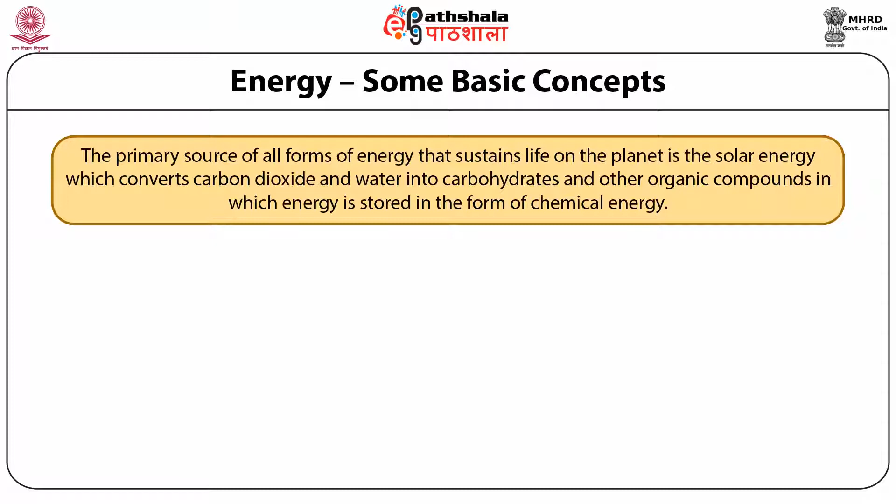Solar energy converts carbon dioxide and water into carbohydrates and other organic compounds, in which energy is stored as chemical energy. In certain situations, these compounds are transformed into coal, oil, and natural gas through geological processes, and when burnt, give heat energy by releasing chemical energy.

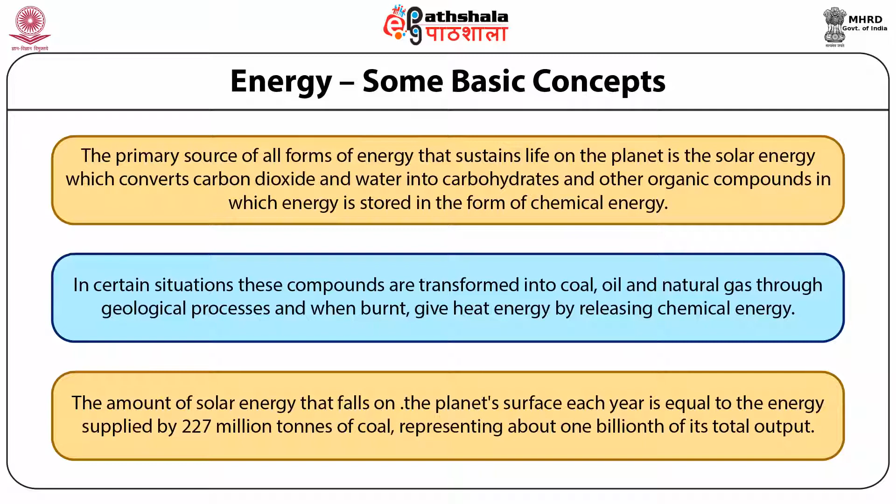The amount of solar energy that falls on the planet's surface each year is equal to the energy supplied by 227 million tons of coal, representing about one billionth of the sun's total output. The rest streams out in all directions into space. In one second, the sun gives off more energy than all people have produced till now, and the sun will continue to supply energy at this rate for a few billion years to come.

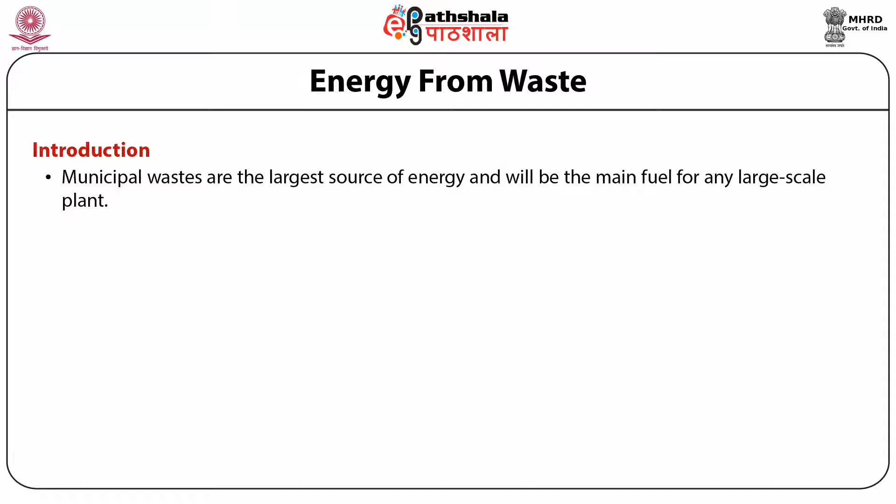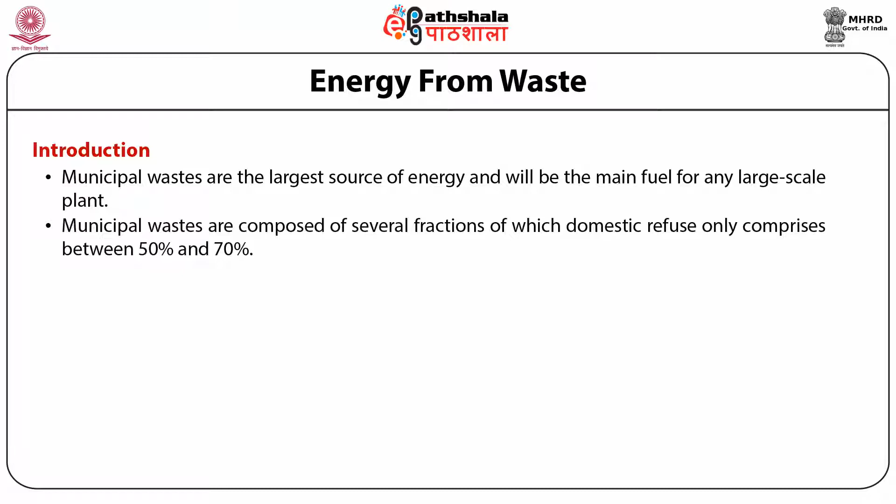Energy from waste: Municipal wastes are the largest source of energy and will be the main fuel for any large-scale plant. Municipal wastes are composed of several fractions, of which domestic refuse only comprises between 50% to 70%. Other categories are waste from waste reception centers, waste from districts' own functions such as housing, markets, and special collection of bulky waste, and some trade waste.

These latter categories are almost all bulky in nature but have a higher calorific value than domestic refuse. The calorific value of domestic refuse is about 9 MJ per kilogram gross, or 7.5 MJ per kilogram net, whereas the gross calorific value of bulky waste has been measured in the range of 11 to 13 MJ per kilogram.

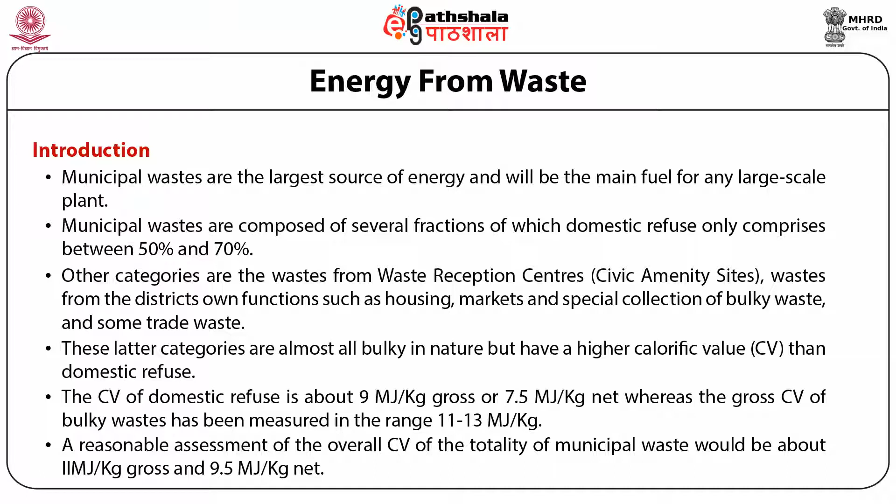A reasonable assessment of the overall calorific value of the totality of municipal waste would be about 11 MJ per kilogram gross. These figures underline the advantage, for energy recovery purposes, of burning the total combustible waste arising, and since bulky waste is costly to transport and landfill, it also makes sense from a waste disposal viewpoint.

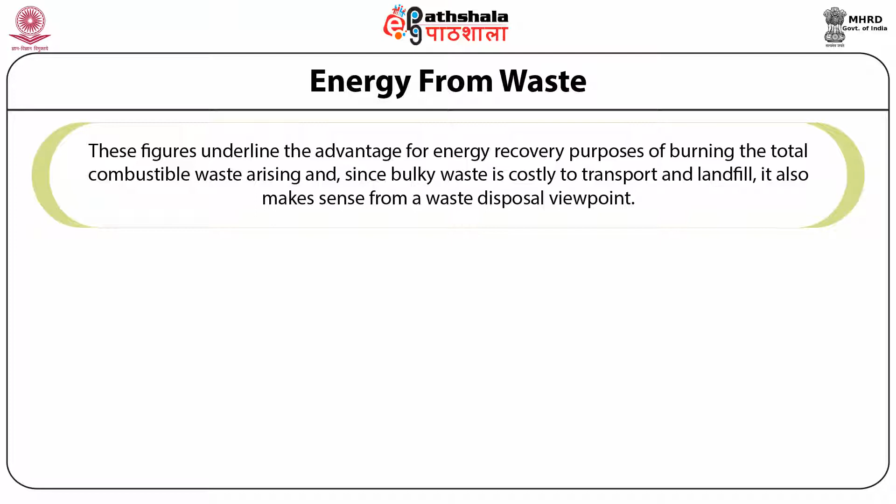Other wastes such as general industrial waste, very similar to bulky municipal waste, tires, fragmentizer waste from car shredding, wood waste, hospital waste, straw and chicken litter can also be utilized where they are of large enough quantities as an economic outlet for the energy. However, there is a sound argument for building a large, efficient central plant designed to burn the maximum amount of waste arising in its catchment area.

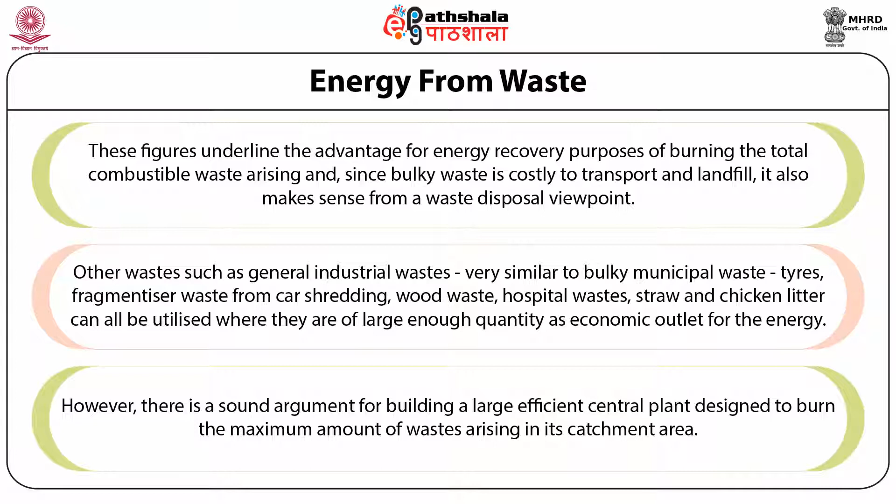This will not apply to straw or chicken litter, which do not have sufficient fuel value in relation to their bulk to travel any distance economically, but it could apply to hospital waste if appropriate handling arrangements were made. The economics of energy from waste revolve around the price obtainable for electricity. If heat can be sold in bulk as well, that will be an advantage, but really substantial opportunities for CHP are rare, and electricity generation must remain the core activity.

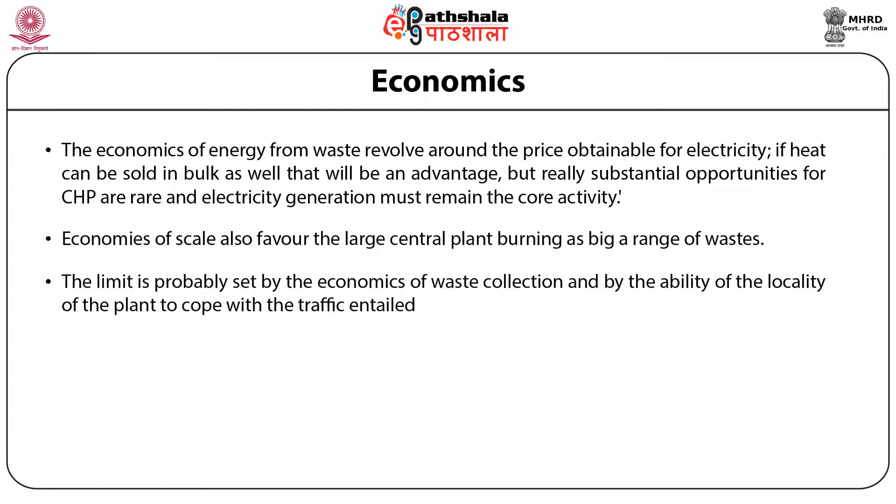Economies of scale also favor the large central plant burning as big a range of wastes. The limit is probably set by the economics of waste collection and by the ability of the locality of the plant to cope with the traffic entailed. A capacity of about 1,200 tons a day is about the optimum without using satellite transfer stations to bring in waste from afield.

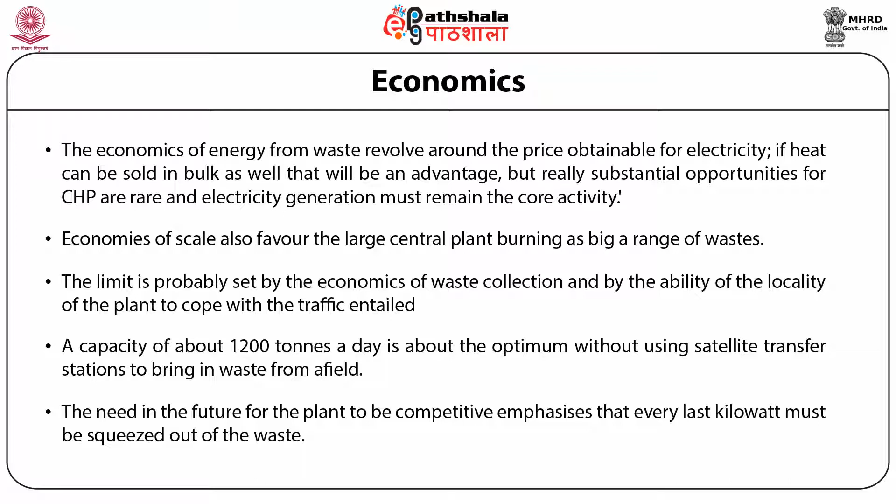Such a plant with an efficient boiler using waste with a net CV of 9.5 megajoule per kilogram ought to extract 0.75 megawatt-hour from a ton of waste, postulating a generating capacity of 37.5 megawatt for 24 hours operating, or 53 megawatt if only operated for 17 hours a day. The need in the future for the plant to be competitive emphasizes that every last kilowatt must be squeezed out of the waste.

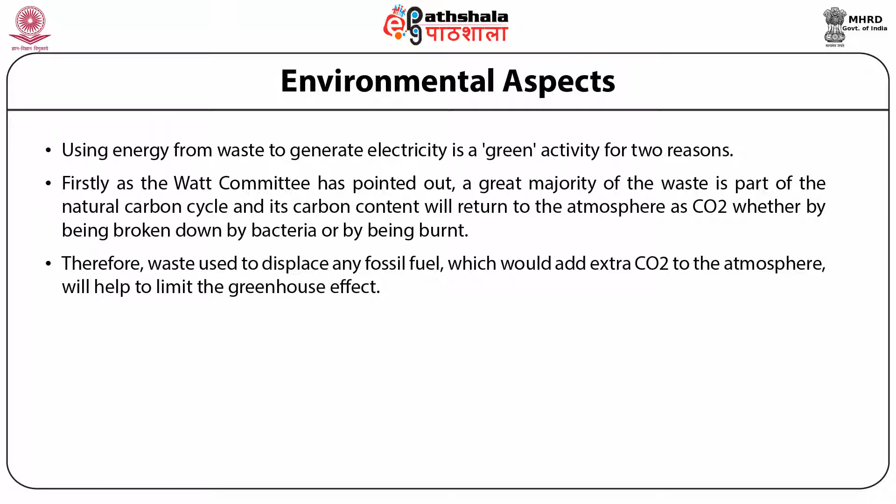Environmental aspects of energy production. Using energy from waste to generate electricity is a green activity for two reasons. Firstly, as the Watt Committee has pointed out, a great majority of the waste is part of the natural carbon cycle, and its carbon content will return to the atmosphere as carbon dioxide, whether by being broken down by bacteria or by being burnt. Therefore, waste used to displace any fossil fuel which would add extra carbon dioxide to the atmosphere will help to limit the greenhouse effect.

Further to that, the bacteria convert much of the carbon to methane. Secondly, as a fuel it has had no energy spent on it, as opposed to coal, oil or even gas, which will have had a considerable amount of energy spent on them by the time they enter a boiler - such energy will have already made its contribution to the pollution of the atmosphere.

Waste processing provides an opportunity to increase the amount of both ferrous and non-ferrous metals recovered, and as regards paper and plastic, if indeed the recycling of the latter is economic, these materials are probably only kept out of the waste stream for a couple of cycles before they enter it for good. The maximum amount of recycling that was likely to take place would have little effect on the recovery of energy from waste.

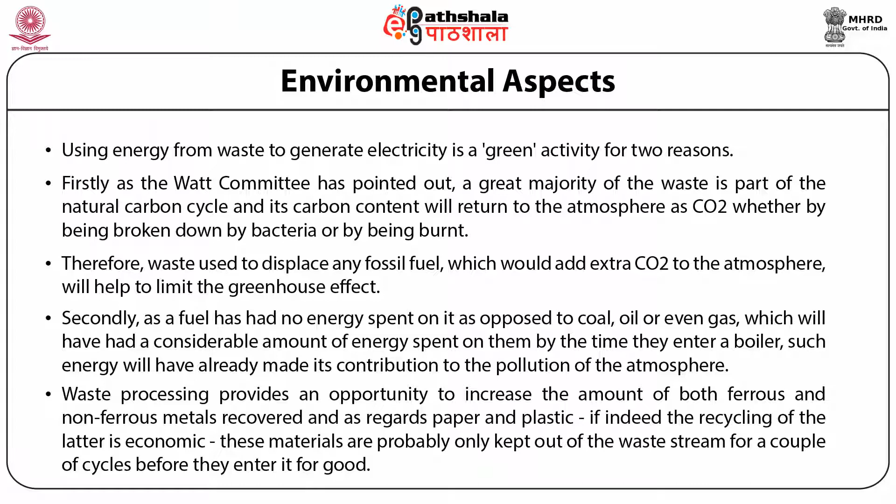Another aspect of energy from waste is that outdated technologies are mainly responsible for generating large quantities of waste. These wastes may be liquid or gaseous. The industry-wise quantities of generation of all such wastes and their characteristics are not accurately known in many cases. Their unsystematic and hazardous way of management leads to serious environmental degradation.

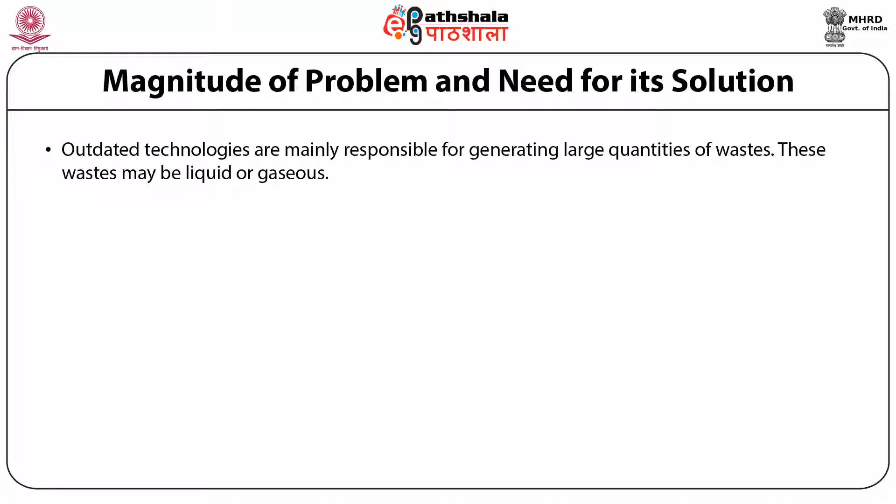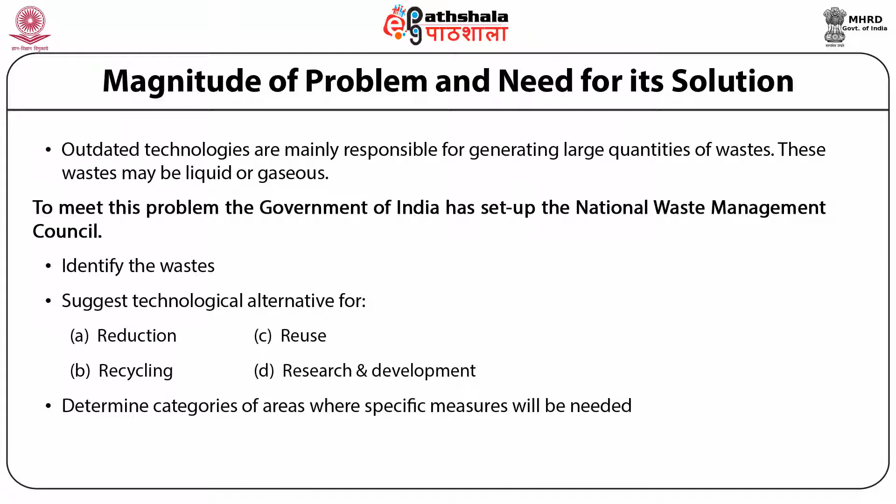To meet the problem, the Government of India has set up the National Waste Management Council, which identifies the waste, suggests technological alternatives for reduction, recycling, reuse, and research and development. It also determines categories of areas where specific measures will be needed, and formulates action points as a basis for executive orders to be issued by government, including legislation, taxes, and incentives.

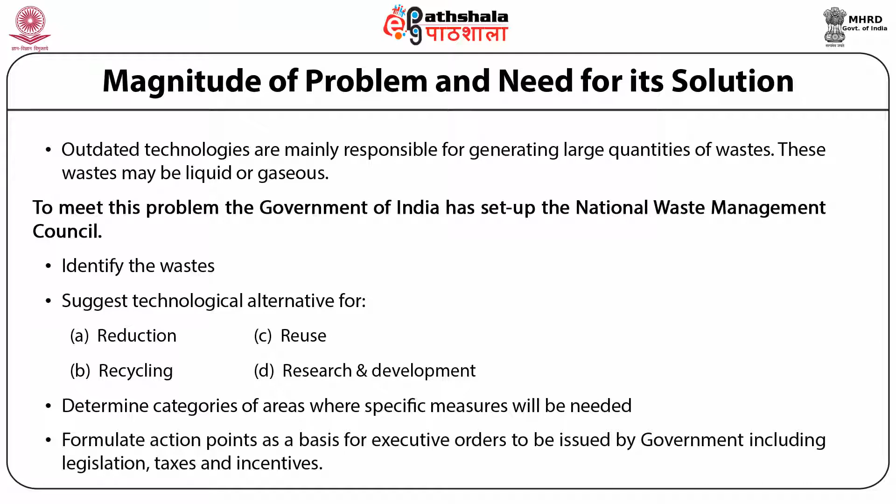The only way to tackle industrial waste is to regard it in terms of a management issue rather than in terms of a problem or an irritant, as is the case today. This would give the approach to this issue a more realistic and practical sense.

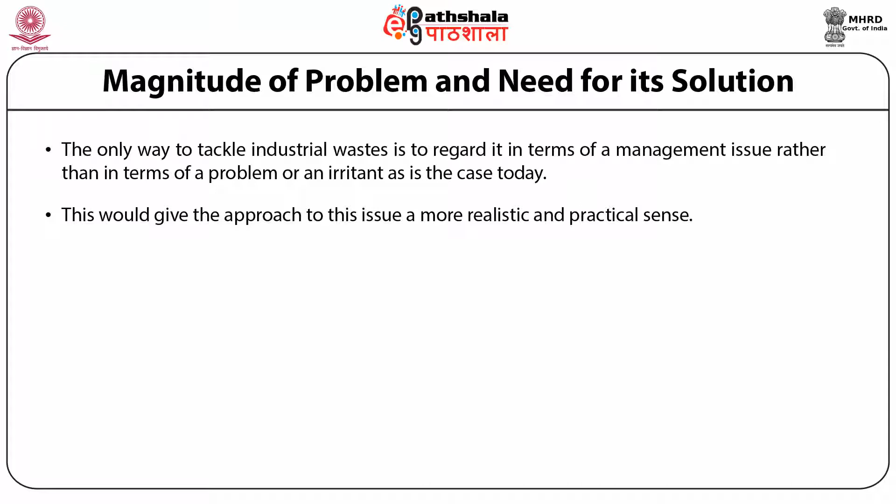Thus, it calls for a review of the entire manufacturing process, the purpose of which would be to identify possibilities of minimization of discharges, be it solid or liquid, or recover it at various production stages itself. Reusable, reprocessable, or sellable material which otherwise would at the end of the pipe be discarded as waste could be viably recovered. For this, a cost-benefit analysis taking into account additional process equipment needs to be made.

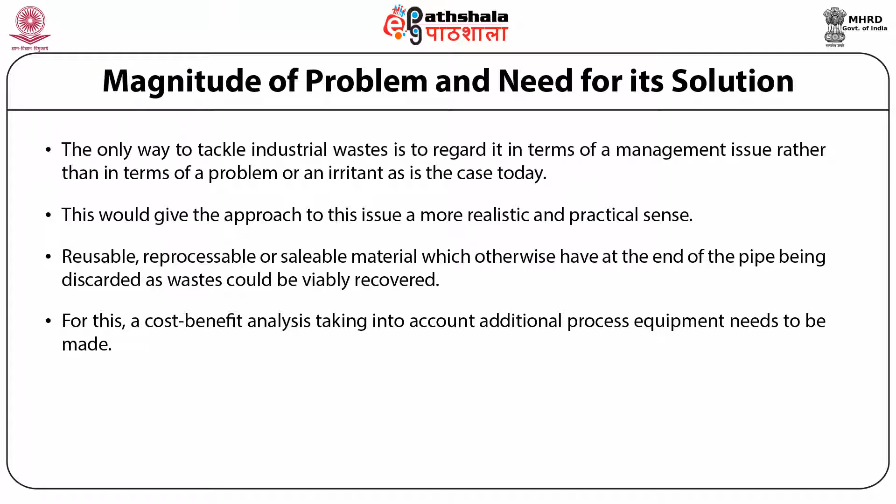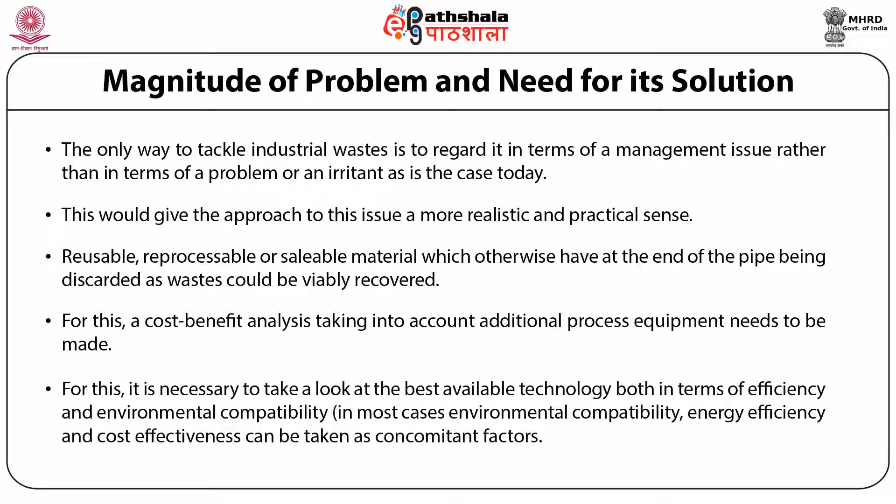Today, with the evolution of eco-friendly technologies, the company can very easily quantify what it stands to gain by a more efficient process. For this, it is necessary to take a look at the best available technology, both in terms of efficiency and environmental compatibility. The very important thing is to realize the fact that it is damaging for any industrial enterprise in the long term to be anything other than environmentally friendly.

To have such a management-oriented approach in respect of waste, it is imperative that government and policymakers adopt an attitude which is conducive for industry to convert to more environmentally friendly processes. The change should not only be in legislation but in utilization, in implementation of procedures, and in the functioning of the executive arms of the policy making bodies.

The advantages of recovery are highlighted by the work being carried out at National Environmental Engineering Research Institute, Nagpur, as quoted in the report of the subgroup on industrial waste management under National Waste Management Council in the Ministry of Environment and Forests.

Overall, if industry is generating waste, and naturally every industry will generate waste, the waste should be recycled in such a way that it is converted into products which are useful. One of the essential requirements of industry is energy. So waste should be converted into byproducts that can be used, and this conversion should release energy which may be used again for running the industry.

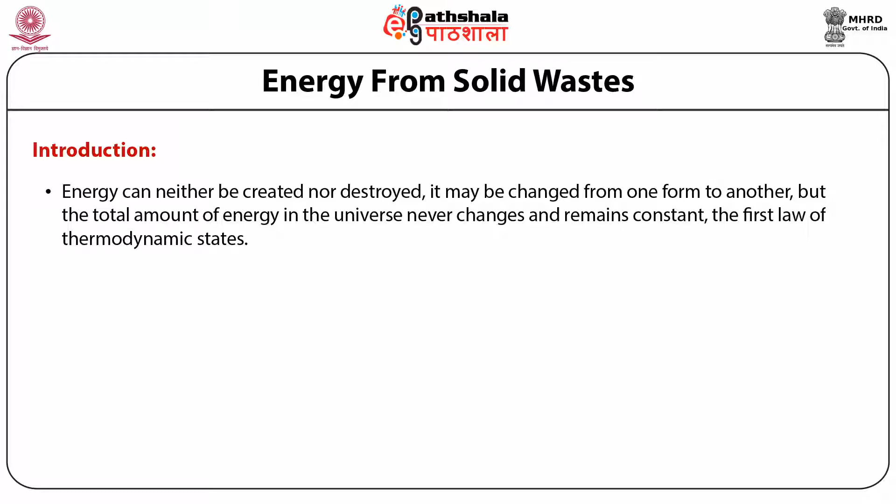Actually, there is no energy scarcity, but there is energy resource scarcity. Energy is not depleting, but the energy resources are depleting. For example, resources like oil, coal, gas, and firewood are fast depleting. That is why energy resource scarcity is reported all over the world, including in many parts of India, both rural and urban areas.

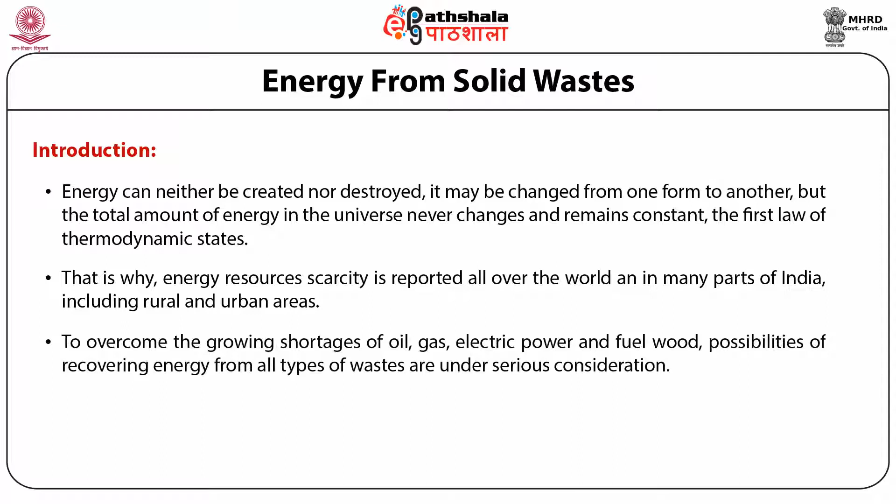To overcome the growing shortages of oil, gas, electric power, and fuel wood, possibilities of recovering energy from all types of waste are under serious consideration. That is why our National Waste Management Council has set up a subgroup to study and identify wastes, and to suggest action points for recycling and reusing these wastes and recovering energy from them.

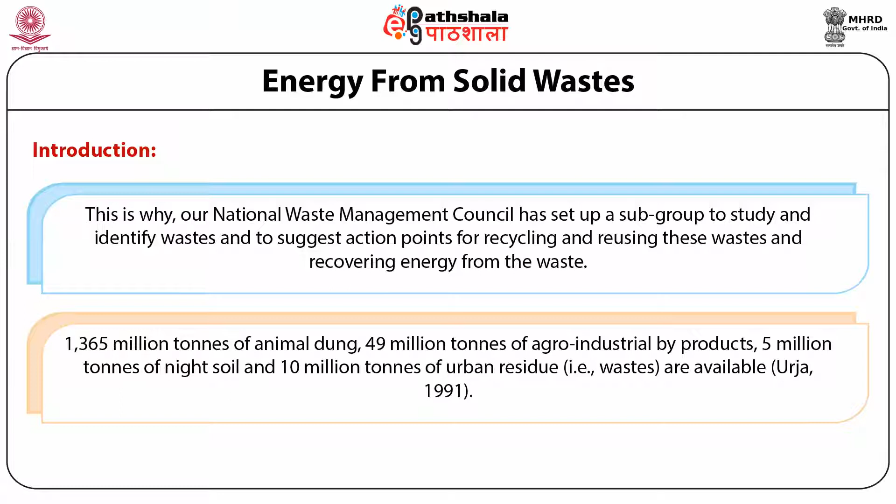The subgroup has identified that in India, 322 million tons of agricultural residues, 1,365 million tons of animal dung, 49 million tons of agro-industrial byproducts, 5 million tons of night soil, and 10 million tons of urban residues are available. From these statistics, it is evident that in India, very huge quantities of waste are generated.

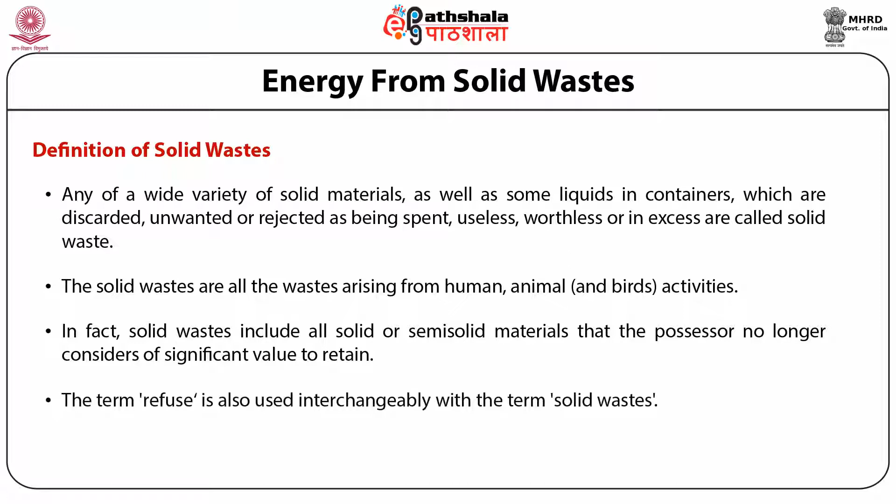Definition of solid waste: any of a wide variety of solid materials, as well as some liquids in containers, which are discarded, unwanted, or rejected as being spent, useless, worthless, or in excess, are called solid waste. Solid wastes also arise from human, animal, and bird activities. In fact, solid wastes include all solids or semi-solid materials that the possessor no longer considers of significant value to retain. The term refuse is also used interchangeably with the term solid waste.

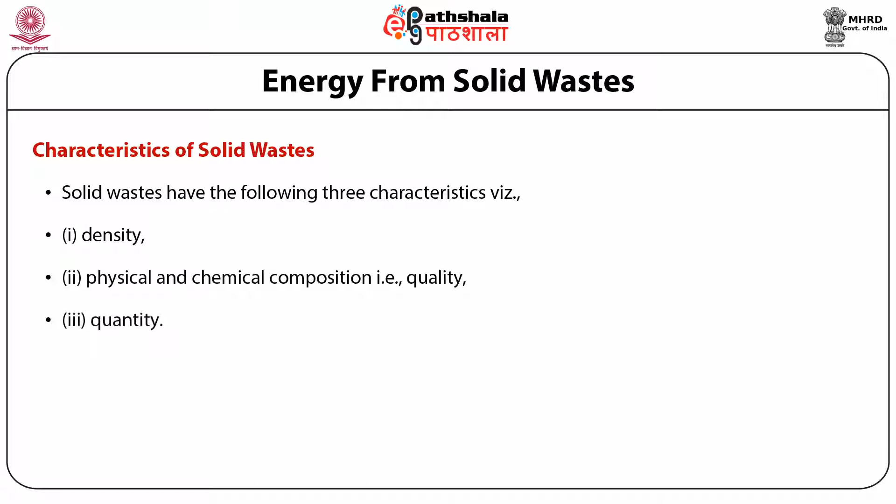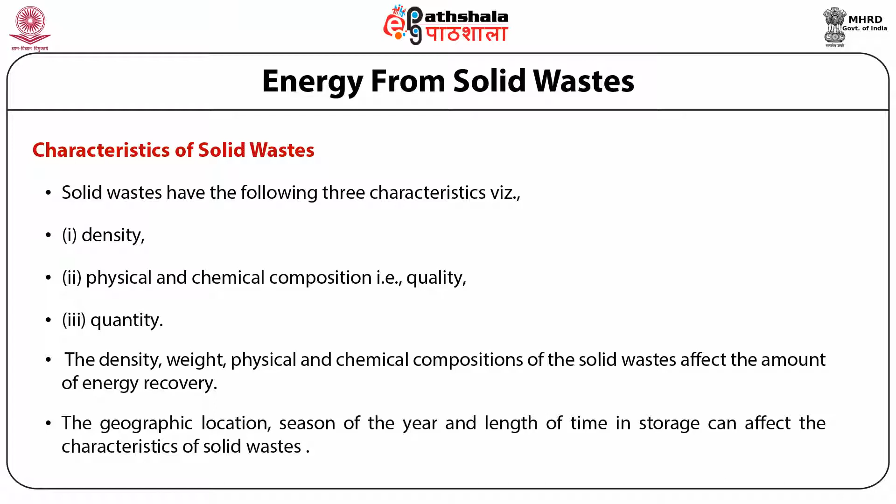Solid wastes have the following characteristics: density, physical and chemical composition, quality, and quantity. The density, weight, physical and chemical composition of solid waste affect the amount of energy recovery. The geographic location, season of the year, and length of time in storage can affect the characteristics of solid waste, and these variations in turn affect energy recovery.

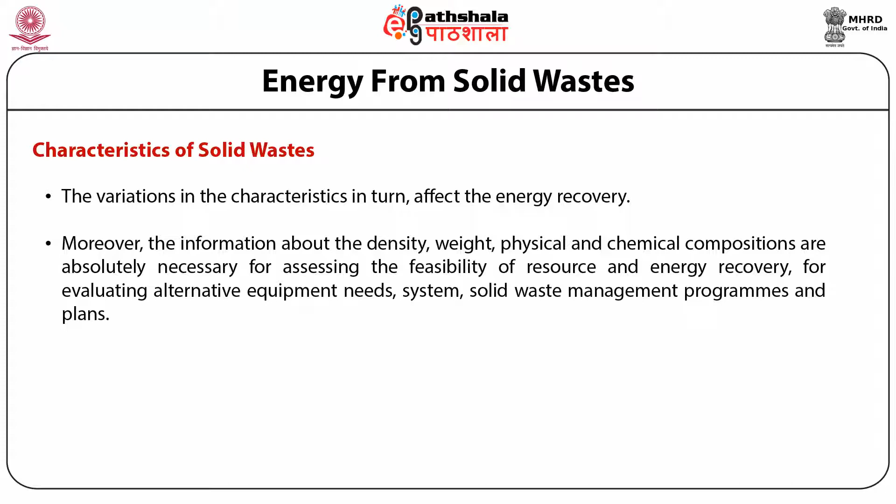Information about density, weight, and physical and chemical composition is absolutely necessary for assessing the feasibility of resource and energy recovery, for evaluating alternative equipment needs, systems, solid waste management programs, and plans. Therefore, the methods of measuring such characteristics are explained here.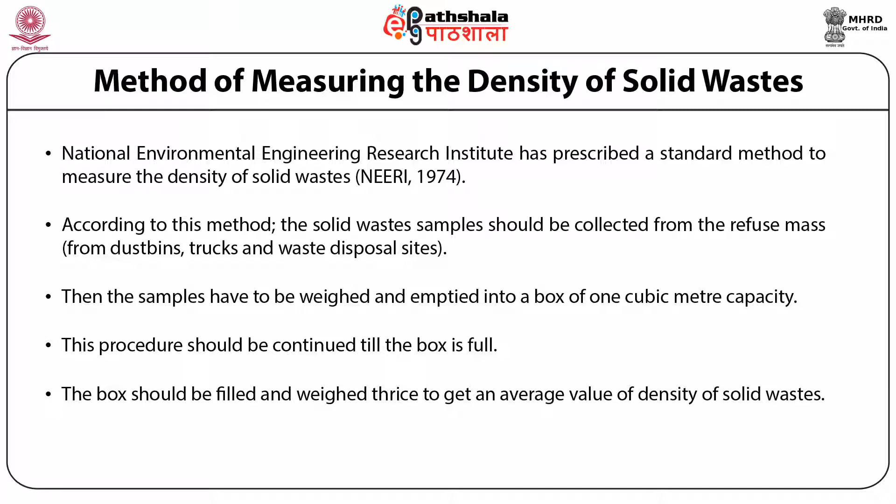The National Environmental Engineering Research Institute has prescribed a standard method to measure the density of solid waste. According to this method, solid waste samples should be collected from the refuse mass, then weighed and emptied into a box of 1 cubic meter capacity. The procedure should be continued till the box is full, and the box should be filled and weighed thrice to get an average value of density of solid waste. This method was followed in some Indian studies.

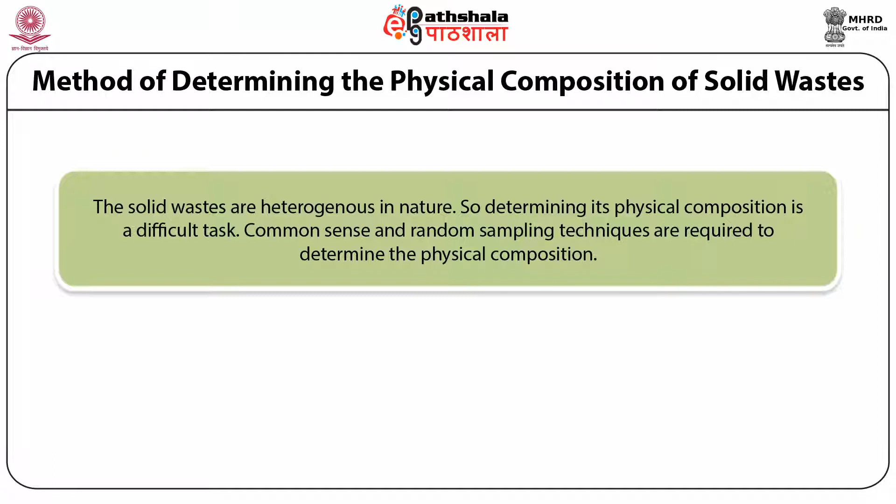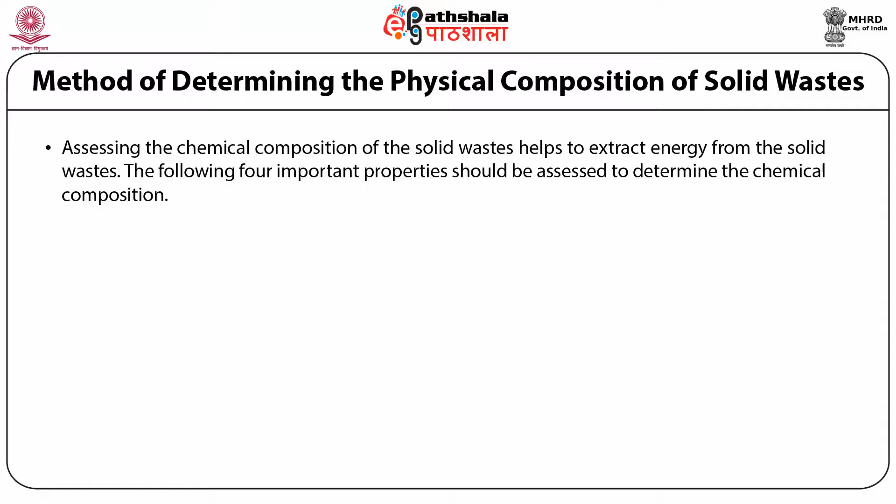Solid wastes are heterogeneous in nature, so determining their physical composition is a difficult task. Common sense and random sampling techniques are required to determine the physical composition. Assessing the chemical composition of solid waste helps to extract energy from it. Four important properties should be assessed to determine chemical composition: proximate analysis, fusing point of ash, ultimate analysis, and heating value.

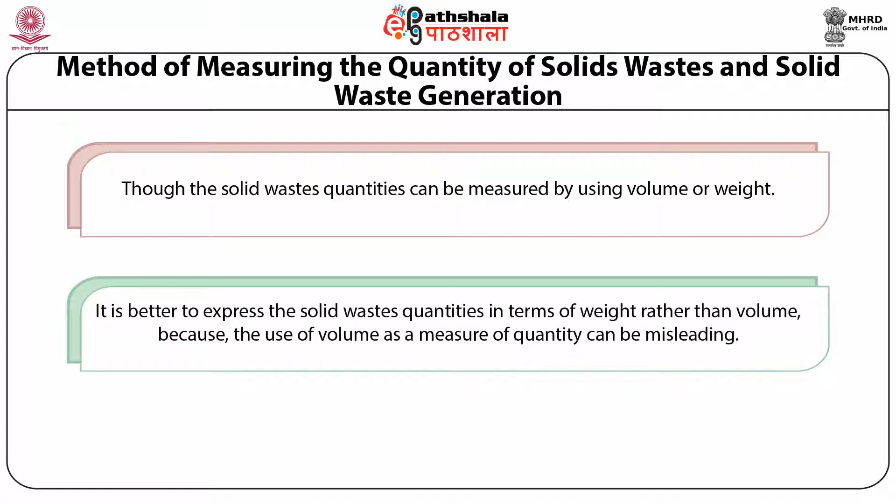Though solid waste quantities can be measured using volume or weight, it is better to express them in terms of weight rather than volume, because using volume as a measure of quantity can be misleading. Most of the solid waste generation figures reported in literature are actually collection rates, not generation rates. The amount of solid waste generated is different from the amount collected.

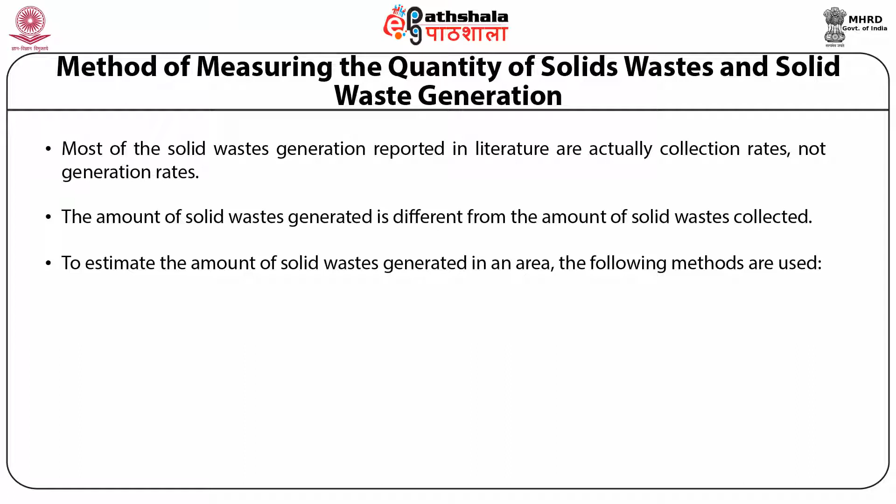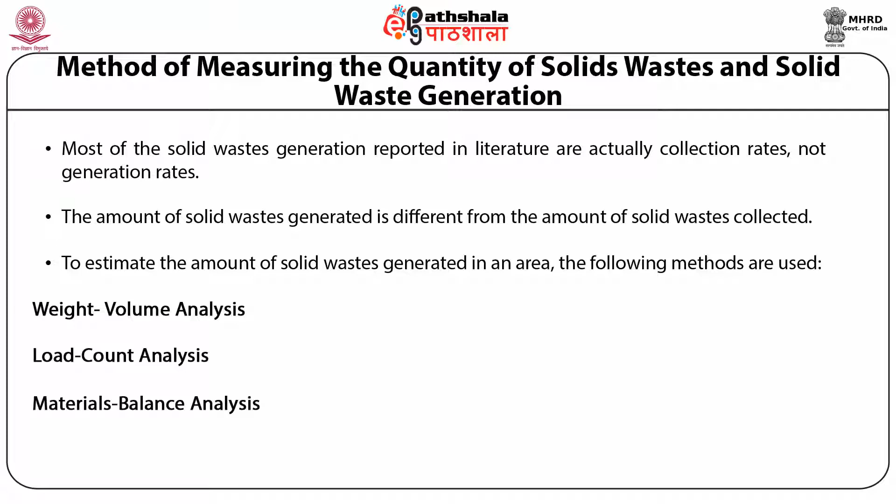To estimate the amount of solid waste generated in an area, certain methods are used. These methods are not being described in detail, but they are: weight-volume analysis, load-count analysis, and materials balance analysis. These are the three methods.

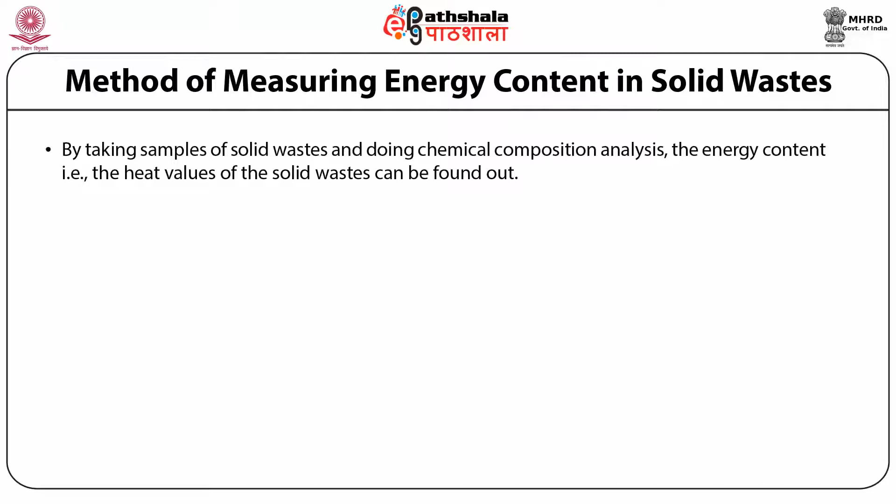Next is the method of measuring energy content in solid waste. By taking samples of solid waste and doing chemical composition analysis, the energy content, that is the heat values of the solid waste, can be determined. If heat values of solid waste are not available, then they can be determined by an indirect method.

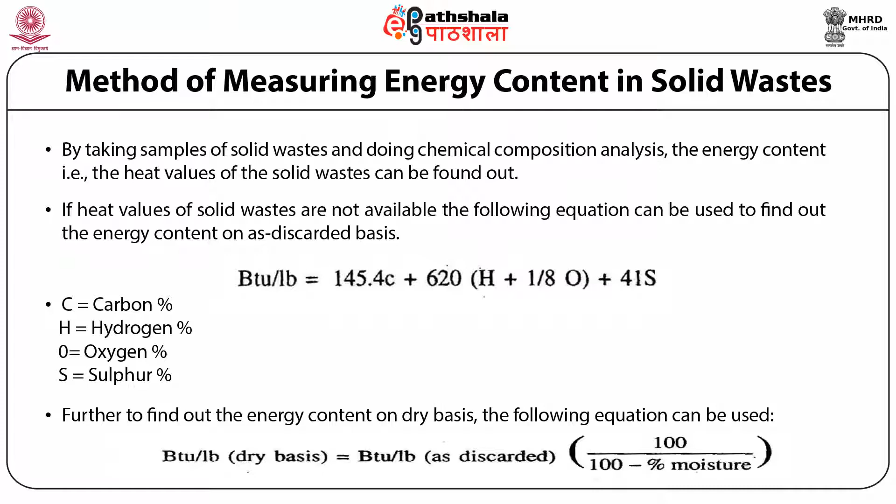If heat values are not available, or if facilities are not available to do chemical composition analysis, then the already obtained heat value results from experiments by other researchers in India can be taken. For instance, in Chennai, 30 samples of solid waste from 30 different area units have been taken and energy content values have been found out.

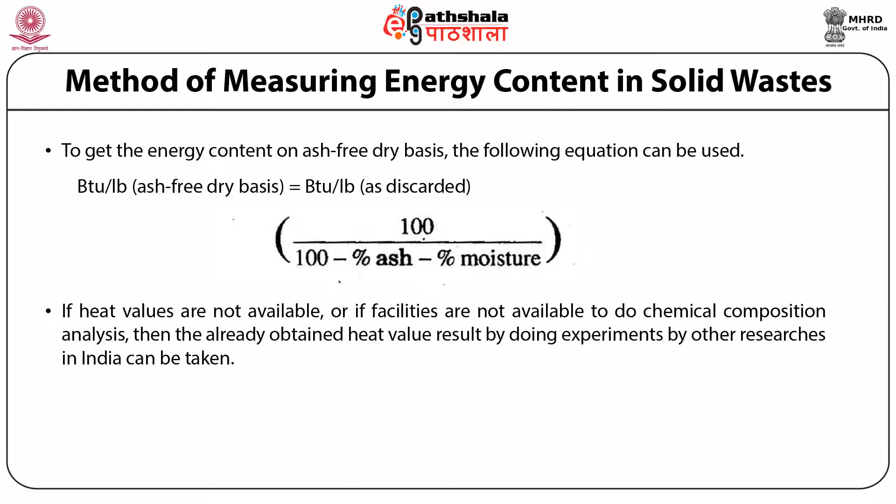The energy content ranges from 3103 kilojoule per kilogram to 6651 kilojoule per kilogram, and the city average is 4595 kilojoule per kilogram. The results show that from 1 kilogram of solid waste, 4595 kilojoules of energy can be recovered, as shown in table 2, which may be due to variations in the physical chemical compositions of the solid waste.

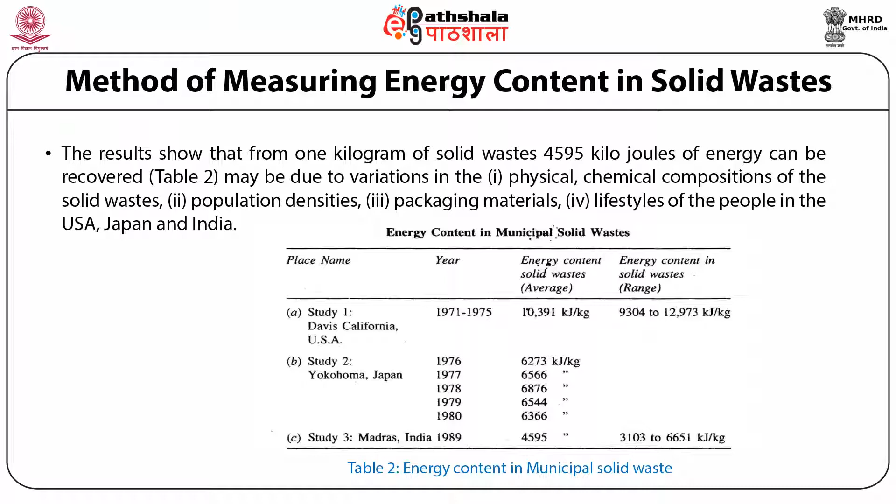Second, population densities, packaging materials, and lifestyles of the people in the USA, Japan and India, and this has been shown in table 2, a comparative study. Moreover, in Chennai, before municipal staff come for refuse collection, some refuse collectors pick up combustible materials from the street dustbin and sell them for money. This may also be a reason for less heat values from solid waste found in Chennai.

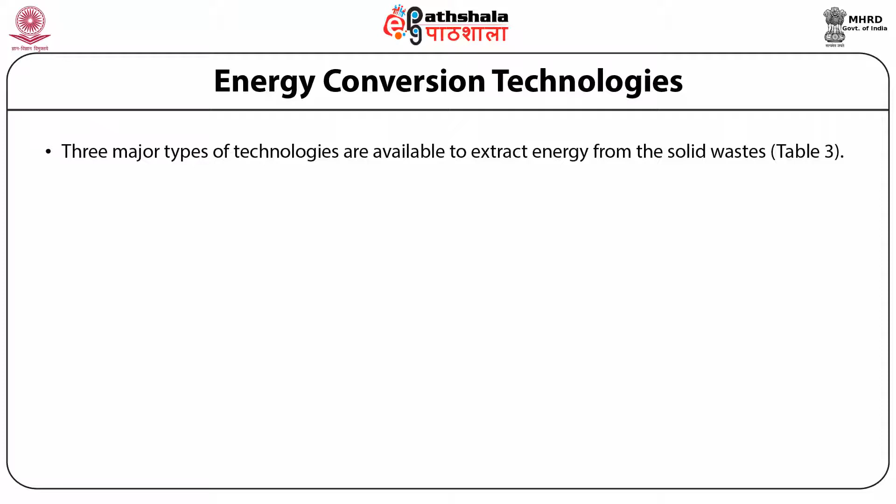Another very important thing is the energy conversion technologies. Three major types of technologies are available to extract energy from solid waste, as shown in table 3. Any one of the methods can be chosen depending upon the resources to be recovered and types of energy to be extracted. A brief discussion on each process of extracting energy will be discussed in the lecture.

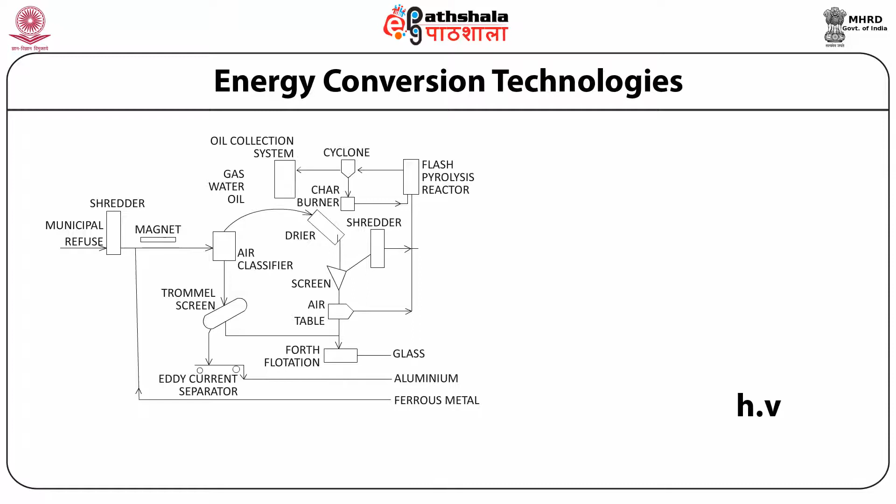So one of the processes is the combustion process. Combustion process is direct burning of the solid waste. By burning the waste, steam is generated which is used to produce power with the help of a turbine. An energy efficiency of up to 30% is recorded even under controlled conditions.

So, another process is a thermochemical process, pyrolysis. In pyrolysis, the solid waste can be converted into oil, gas, and carbon char. The organic material is destructively distilled in the absence of air or oxygen. A very important thing is how the waste can be converted into usable product. As you can see, the process is shown in a flow sheet in figure 1.

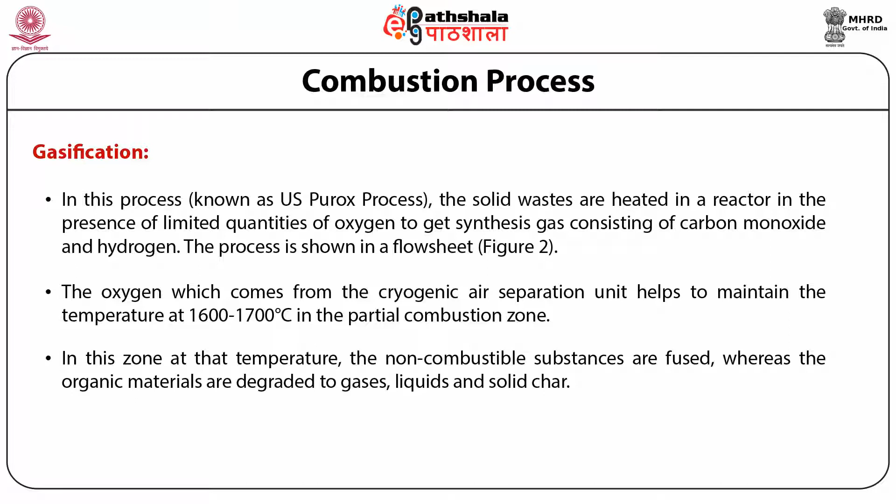In this zone, at that temperature, the non-combustible substances are fused, whereas the organic materials are degraded to gases, liquids and solid char. As the gases rise and get dried, they preheat the charge before exiting at 250 degrees centigrade.

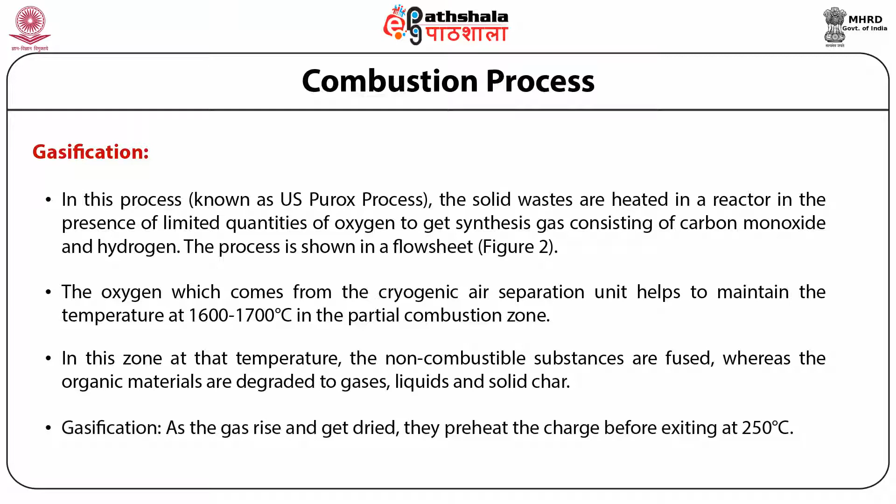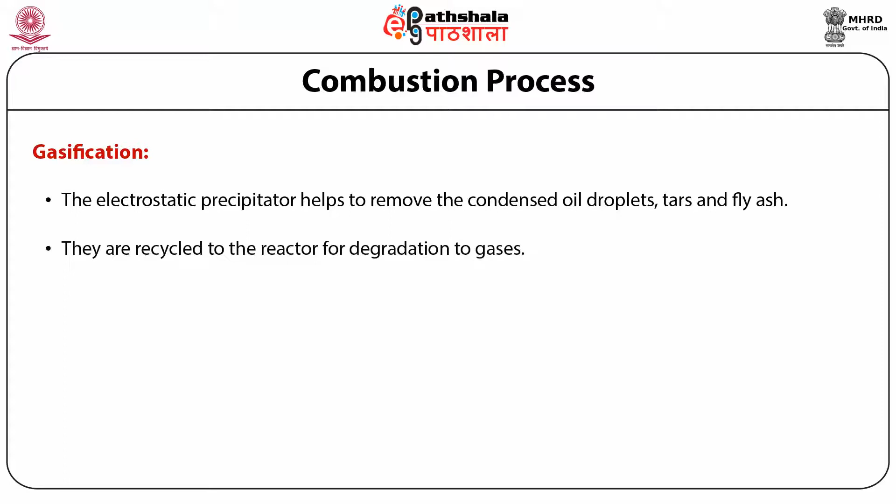The electrostatic precipitators help to remove the condensed oil droplets, tars and fly ash. They are recycled to the reactor for degradation to gases. The hydrogen sulfide and organic acids are separated from the gases by a neutralizing solution present within an acid absorber. In a condenser, the moisture is removed from the saturated gas.

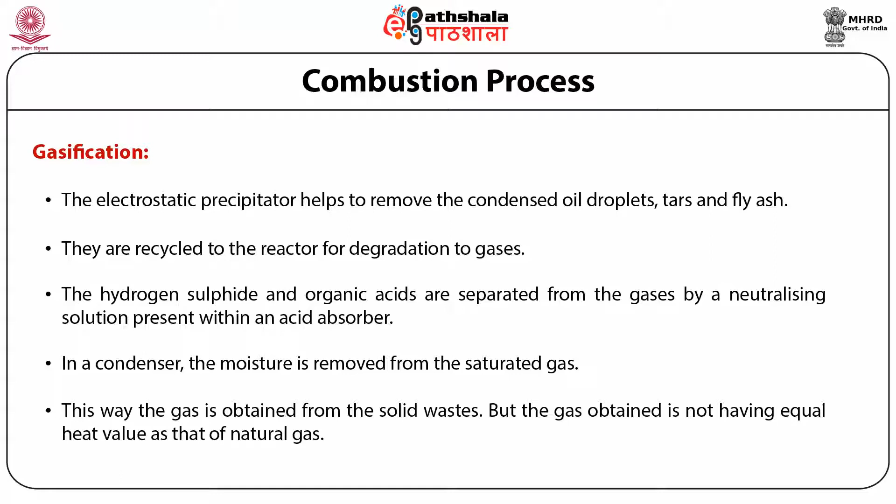This way, the gas is obtained from the solid waste, but the gas obtained does not have equal heat value as that of natural gas. The gas produced by the Purox process can be made equal to natural gas in terms of heat value. For this purpose, the gas produced by the Purox process can be methanated to substitute natural gas through the reaction of carbon monoxide with hydrogen, which forms methane and water.

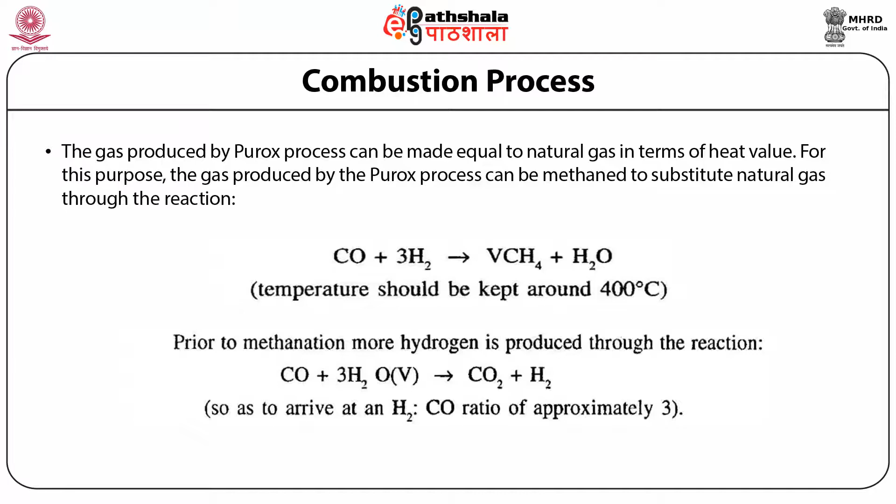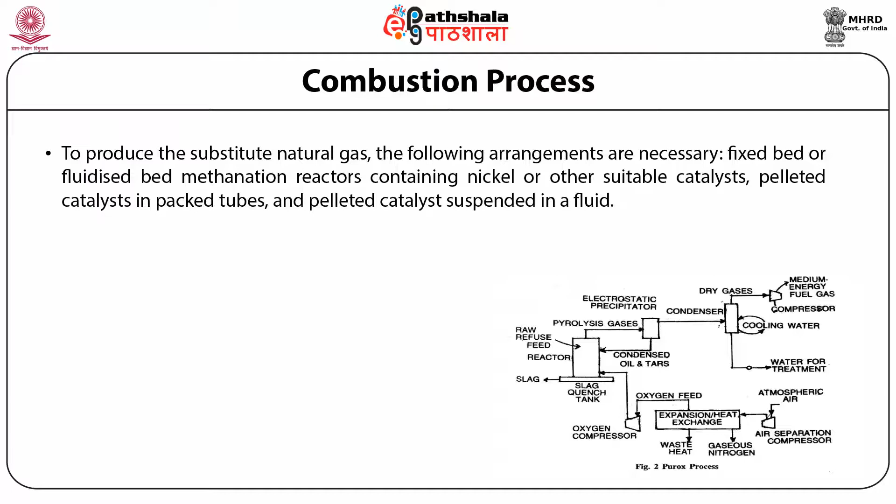Prior to methanation, more hydrogen is produced through reaction. Carbon monoxide reacts with more water vapor and forms carbon dioxide, and hydrogen is evolved. To produce the substitute natural gas, the following arrangements are necessary: fixed bed or fluidized bed methanation reactors containing nickel or other suitable catalysts, pelleted catalyst in packed tubes, and pelleted catalyst suspended in a fluid.

The low-medium energy fuel gas produced in the Purox process can be used to produce electricity. To produce electricity, a combined gas turbine cycle method can be used. A Purox process for the production of energy is shown in figure 2. At a gas turbine inlet temperature of 980 degrees centigrade, an overall heat rate for the original biomass raw material of 12 megajoule per kilowatt hour could be envisaged, giving a net delivered electricity efficiency of 29.4%, which is equal to the electricity derived from coal.

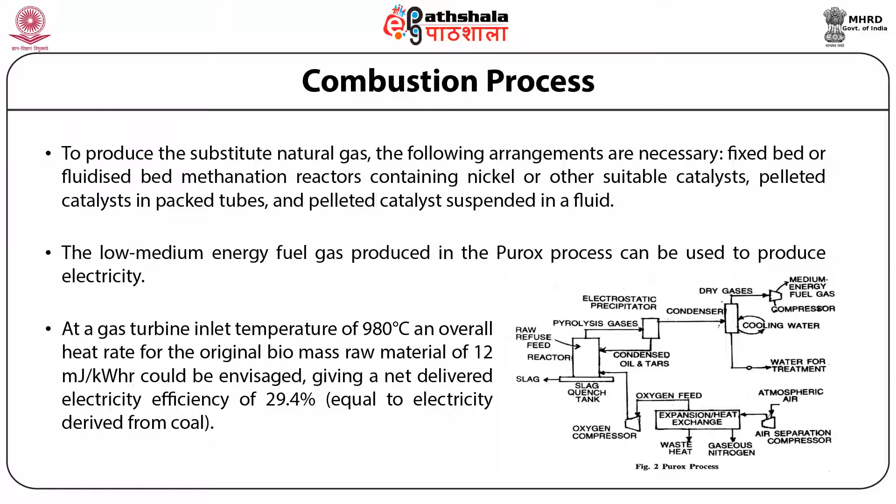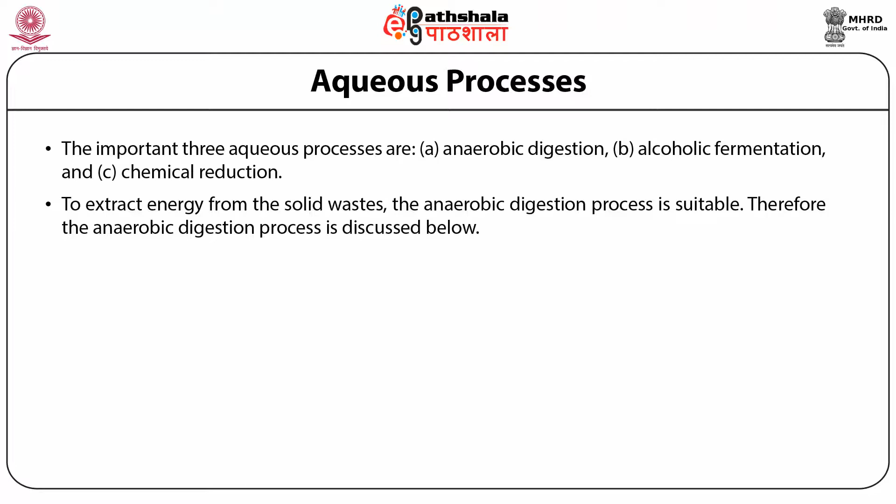Next is the aqueous processes. The important three aqueous processes are anaerobic digestion, alcoholic fermentation, and chemical reduction. To extract energy from the solid waste, the anaerobic digestion process is suitable. Therefore, the anaerobic digestion process is being discussed here. In the anaerobic digestion process, the solid wastes are converted into methane gas. The process of making methane gas is shown in a flow sheet in figure 3.

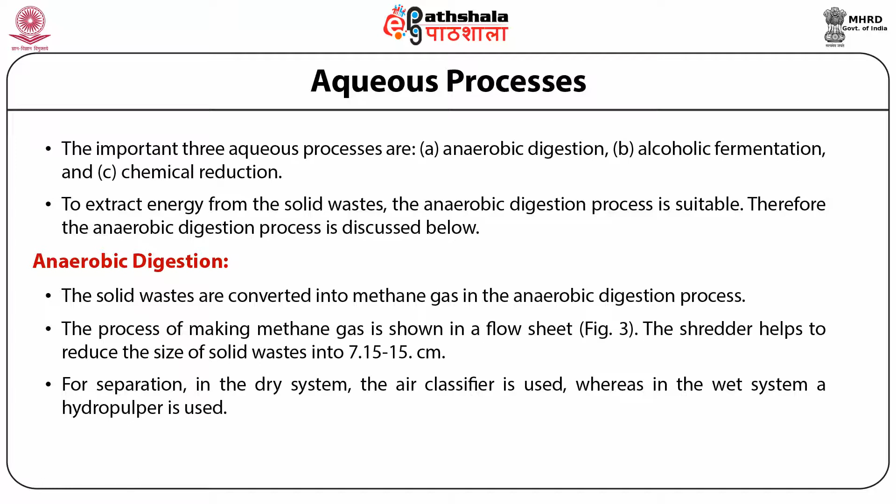The shredder helps to reduce the size of solid waste to 7 to 15 centimeters. Magnetic separator and screen help to remove ferrous metal and fine grit and glass. The separation of inorganic and non-digestible material can be achieved by either a dry or wet system. For separation, in the dry system the air classifier is used, whereas in the wet system a hydropulper is used. Before reaching the digester, the solid wastes are mixed with nutrients as shown in figure 3, and lime and ferrous are mixed in the mixing tank.

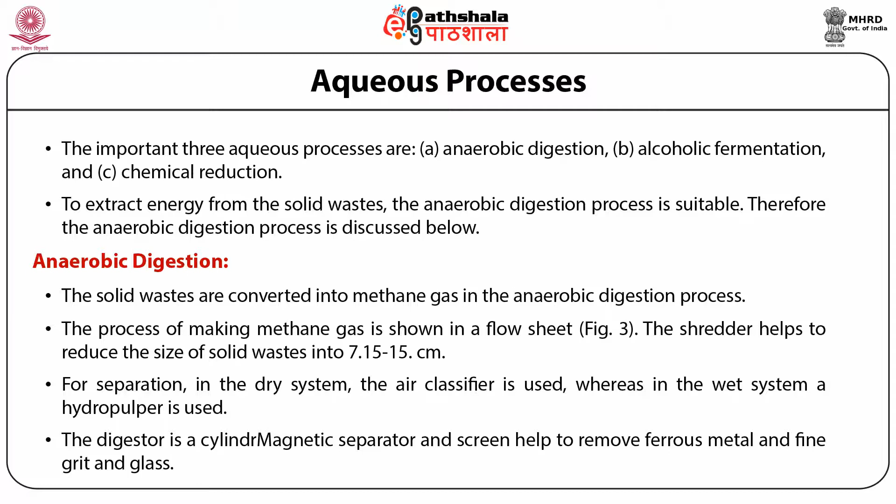The digester is a cylindrical tank just like a biogas unit. In this process also, a stirring mechanism is provided along with the floating cover. The gas produced in the digester contains methane and carbon dioxide in a 50 to 50 ratio. All vegetable waste must be biodegraded anaerobically to produce a composite fertilizer and biogas with suitable starters such as cow dung. However, the conventional biomass digester cannot be used as they require 10% slurry of waste material. Therefore, it is not economical as it involves large investment.

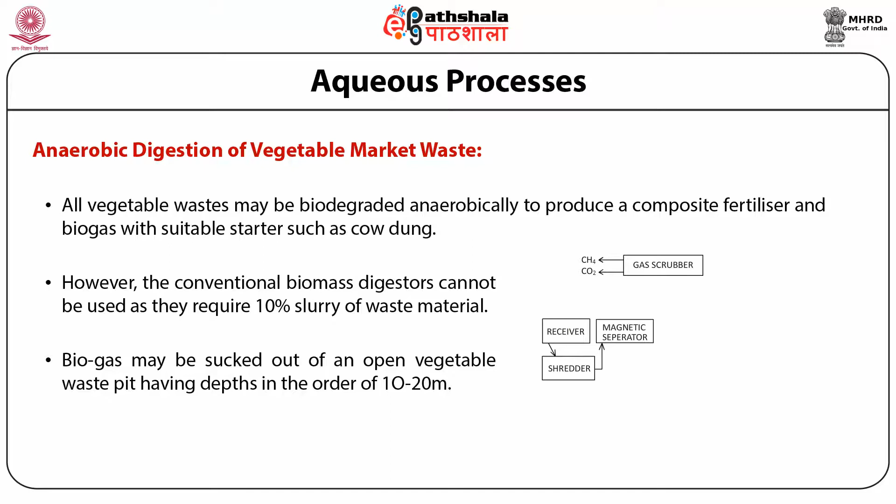Biogas may be sucked out of an open vegetable waste pit having depths in the order of 10 to 20 meters using blowers. It may not be possible to suck out the entire gas produced. A considerable portion of gas produced escapes to the atmosphere.

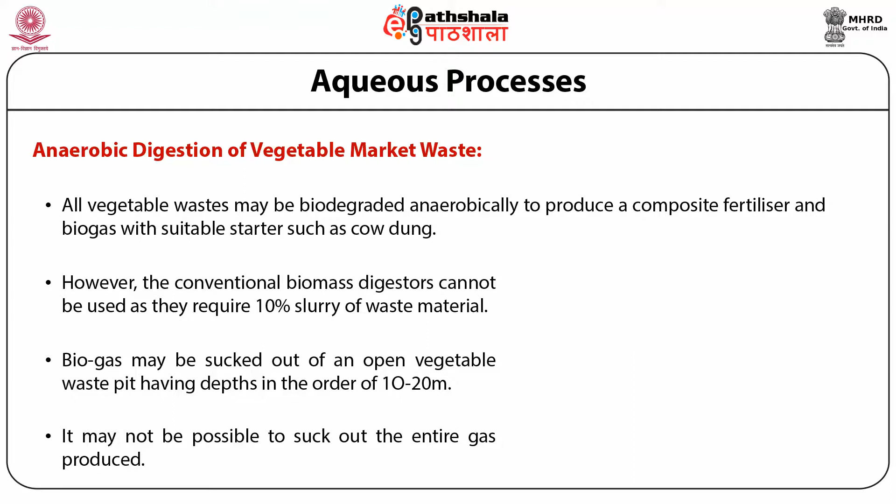So, students, let us summarize what we have learned in this module. In the present module, we have learned how energy can be generated from solid waste. Not only the generation of energy from solid waste, but you have also learned how energy is generated from solid waste in such a way that the byproducts are also useful. Industry will adopt our process only when industry does not have an excess financial burden. It will accept our recycling process when it can use energy in a fruitful way, and the byproducts are also used in a fruitful way.

Solid waste comes from different areas like residential, commercial, and agricultural areas, which is being converted into byproducts with the side-by-side generation of energy. This you have learned in today's module.